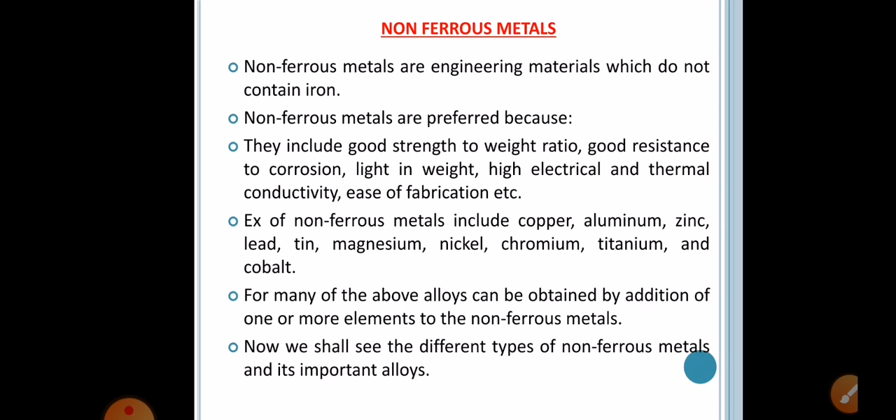And we will see a few of them and their advantages and how do they perform. We'll start with looking at the various, you could say, appearance of these non-ferrous metals. Many a times we can identify a metal just by looking at it. Actually, all of them will have a very different microstructure.

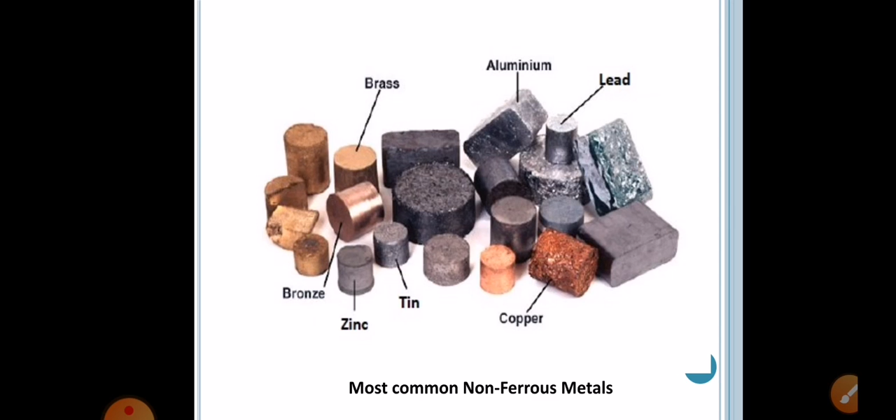The microstructure is, when you observe it under a very special type of a microscope, you can see exactly the grains and the grain boundaries and how it appears under a microscope. And based on the microstructure, you can actually specify which material it is. But for a layman and for us, it is just useful that just by looking at a given metal we can say whether it is a ferrous or non-ferrous, and again in non-ferrous, which one is it: pure copper or aluminum or brass, bronze, and so on.

One of the most important types of non-ferrous metals is aluminium, which in appearance is silvery white. It is very soft and ductile. That is, you can easily give it whatever shape you want. However, the softness can also sometimes be a disadvantage. Hence, pure form of aluminum is generally not used. You are going to add some other metal to it in order to improve these characteristics. So the properties are, it is very light in weight, and you can work on it very easily.

For example, there is an alloy called duralumin, which is an alloy of aluminium, and this alloy is mainly used in aircraft structures. So obviously, aluminium in its pure form, because it is very soft, you can never use it for making aircraft structures and so on. So you have to add something to it. So duralumin is one such alloy of aluminium.

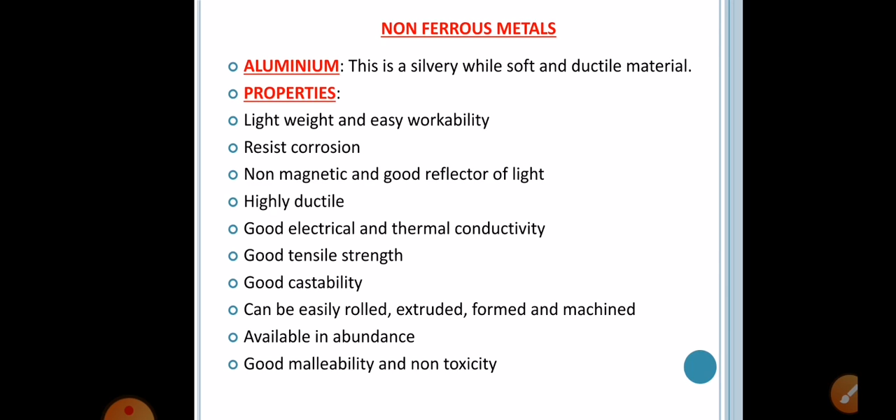Then it is non-magnetic and a good reflector of light because it is shiny. It is highly ductile. That is, you can draw it into thin wires. It has got good electrical and thermal conductivity, good tensile strength, and so on. So these are the properties of aluminum, and you can see what are the various applications, like in electrical appliances, transformers, generators. It is also used in aviation, that is what I just mentioned, and automobile industry, and household applications.

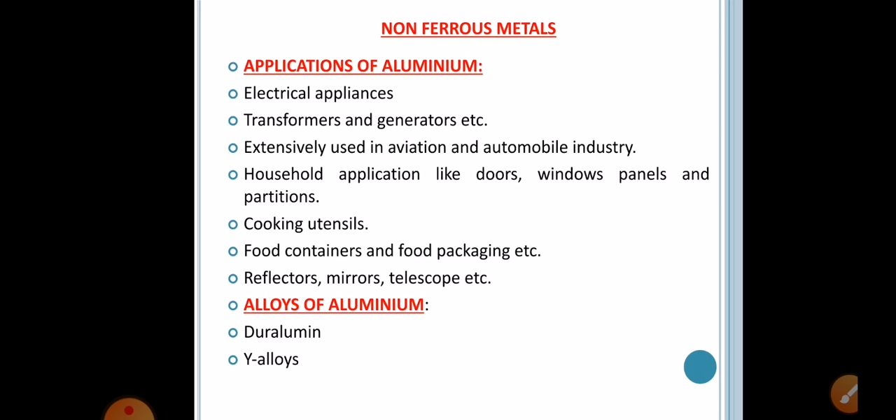These days we have aluminum windows also, and sometimes the door frames are made up of aluminum, cooking utensils, reflectors, mirrors, and so on. And this was the one which I was mentioning, that is duralumin, which is mainly used in aircrafts. So you can see a pictorial representation of where aluminum is used.

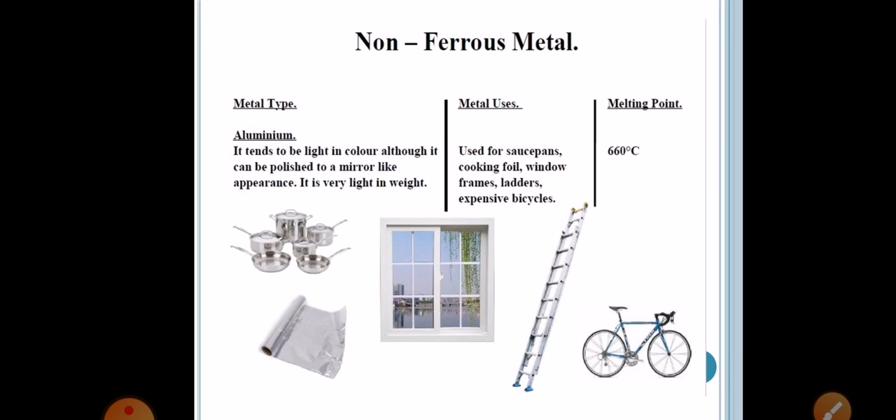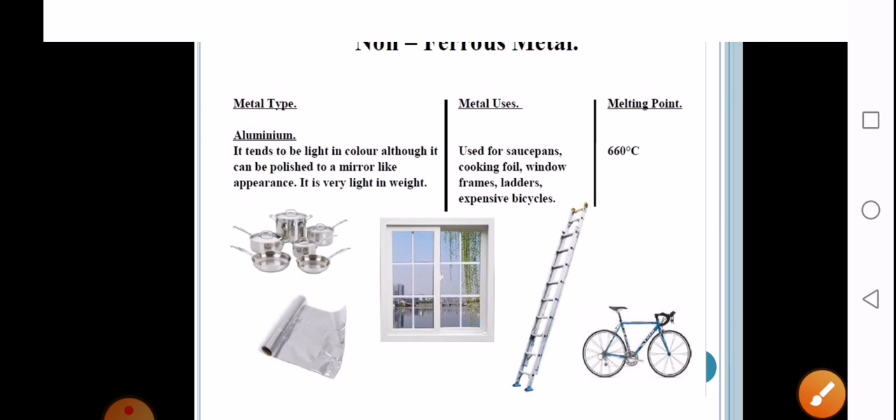We can also see that we have an aluminum ladder which is very popular these days, and some parts of a bicycle can also be made up of some alloy of aluminum, because we want these bicycles, especially racing bicycles, to be as light as possible, so that they will have lesser inertia and can go at a faster rate. The melting point of aluminum is about 660 degrees centigrade.

Now, then we have copper. Copper is the oldest known metal to human beings, and it has got similar properties to that of aluminum. However, the density is more and it is heavier than aluminum. We can say that, again, it has got high electrical conductivity, thermal conductivity, very good corrosion resistance, and so on. However, there was a time when copper was used in abundance in electrical connections and wires.

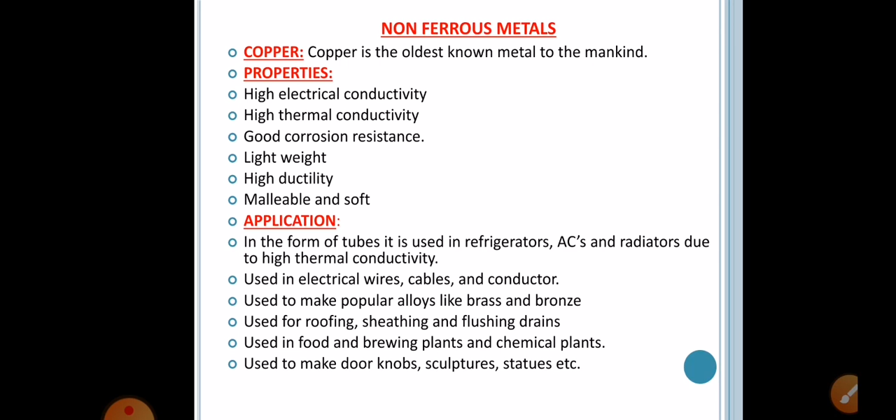However, these days these wires are getting replaced by aluminum wires, mainly because copper has become more expensive. So even though, in applications we say it is used in making electrical wires, cables, and conductors like this, only if there is no other option, then copper is used.

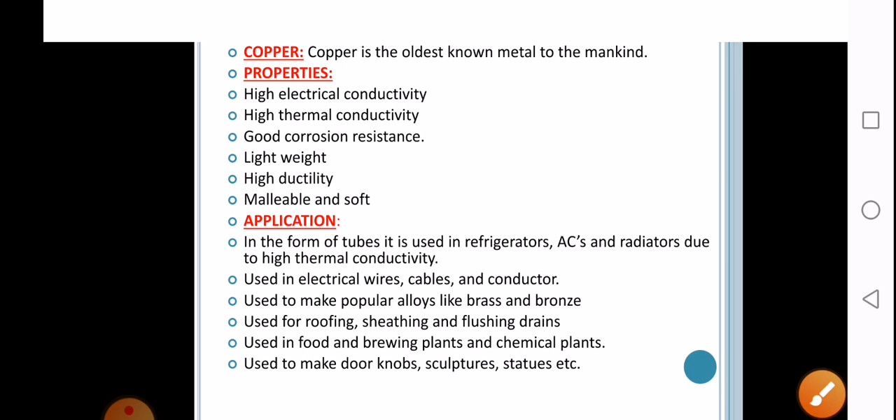Otherwise, aluminum has replaced copper these days. But there are other applications like the tubes. If you remember our discussion on refrigeration and air conditioning, we have the condenser coils and the evaporator coils. These coils or these tubes are generally made up of copper.

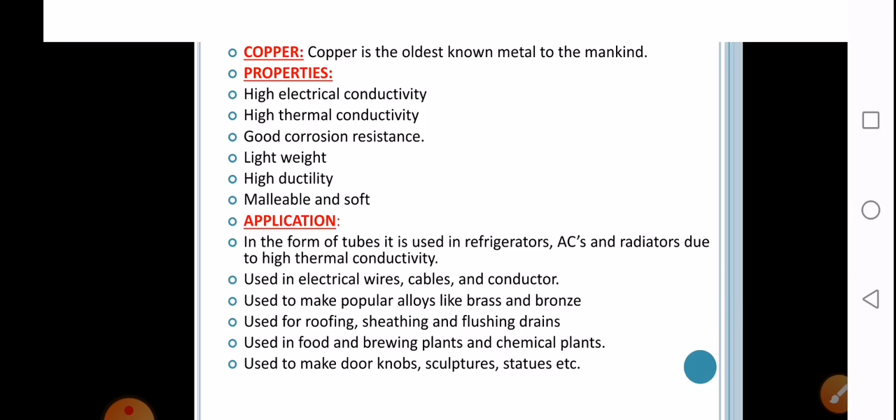And copper is also used in order to make very popular alloys like brass and bronze, which we are going to deal with. And they are used in food and brewing plants, chemical plants, used to make doorknobs, sculptures, statues, etc. So here we can see that the color is again shiny, and that color itself is called as copper color. We generally don't specify it by any particular name.

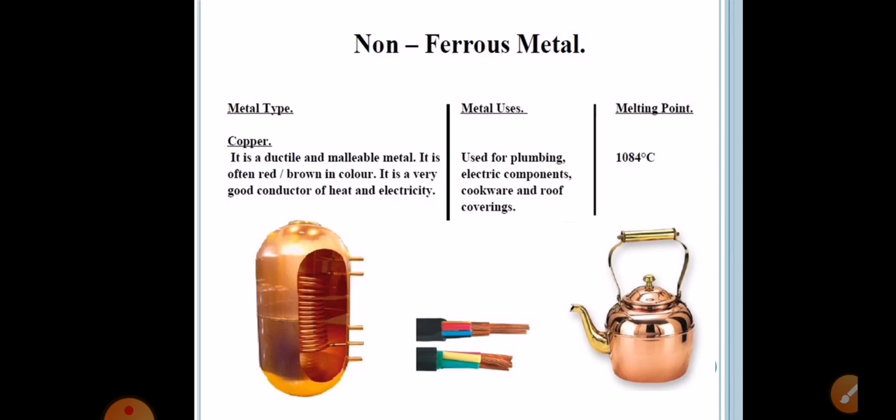And even though it is shown that here it is used for electrical wires and all, these days it has drastically reduced, and newer materials are being used. And the melting point of copper is about 1084 degrees centigrade.

Now we will see the alloys of copper, and two main alloys of copper are brass and bronze. Okay, so even though we see them in our day-to-day lives, we find it slightly difficult to differentiate between brass and bronze. The only way in which we can differentiate is by the color and, of course, their usage. They have got very specific usages.

The first one is brass, where it is made up of copper and zinc. So it can contain 51% to 81% copper, and the remaining part will be zinc. That is, if you use 51% copper, then you will have to use 49% zinc, or if it is 81% copper, then it is 19% zinc.

And the properties are, it is a very good bearing material. We use these as bearings or bushes, many a times, which are used to support rotating shafts. So it is used as a good bearing material, and it has got good machinability. It can be cold worked, that is, you need not heat it in order to give it the required shape and size. At normal room temperature, you can work on it. It has got good castability and resistance to corrosion.

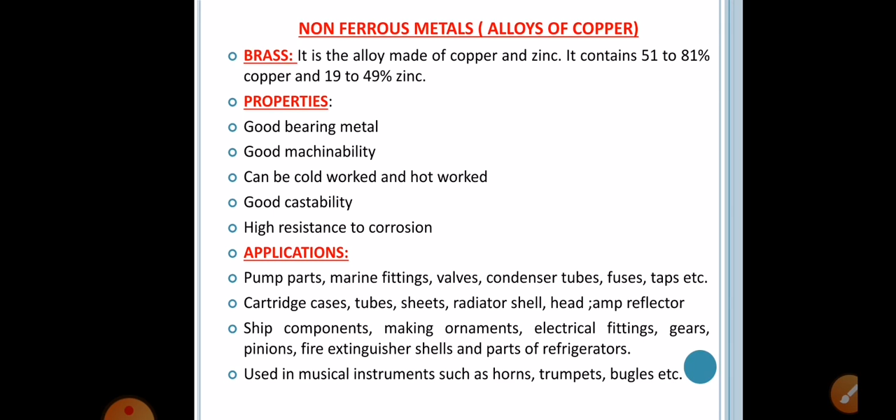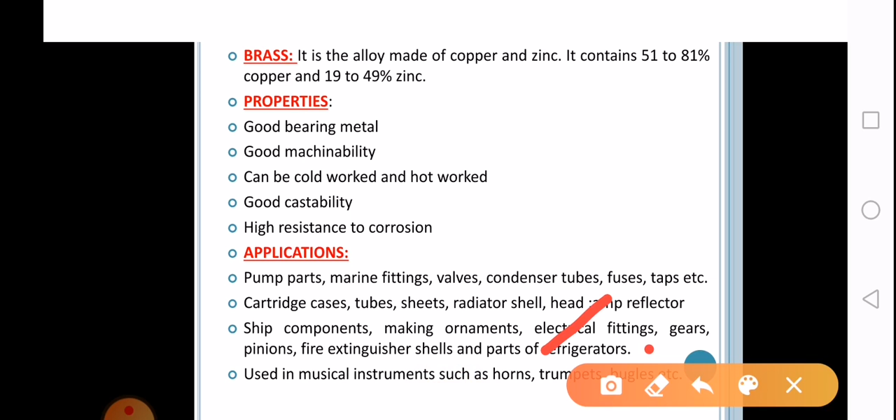And the applications are, they are mainly used in pump parts and marine fittings, valves, condenser tubes, ship components, ornaments, electrical fittings, radiator shells, and so on. These are very common. But if I need to take a very common example, then it is the horns and the bugle and the trumpet. Okay, so we say that it is going to be used in trumpets as well as bugles. So most of you might have, in fact, blown a bugle also in your school days.

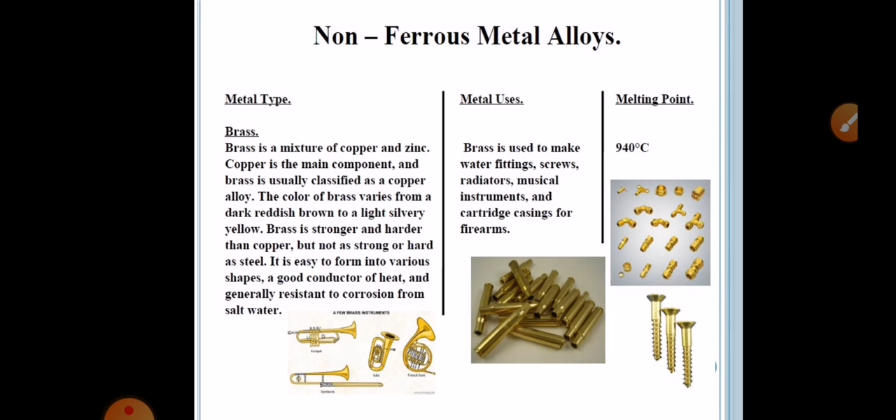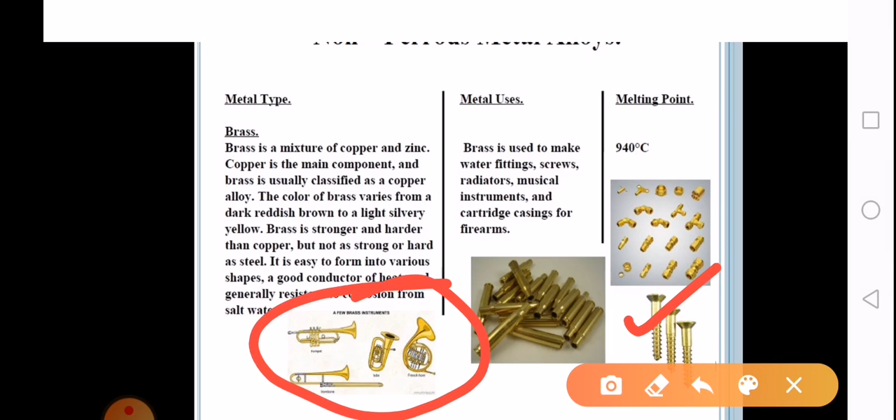So here we can see that it is a very shiny material. In fact, sometimes people get confused with gold also. Brass in its appearance resembles gold. So they can be used for bullet cartridges, that is, in order to make bullets or firearms. And here you can see that they are used for musical instruments. Then sometimes you use screws also. That is, you can make screws made up of brass and so on. And the melting point of brass is 940 degrees centigrade.

Now the next type of alloy of copper is bronze. Here the other metal will be tin. So it is an alloy of copper and tin, and it contains about 5 to 10% of tin, which means that it is made up of about 90% to 95% of copper. This also has got very good strength, and in fact more than brass and copper. It has got good bearing properties and good corrosion resistance, easy machinability, good fatigue strength, and so on.

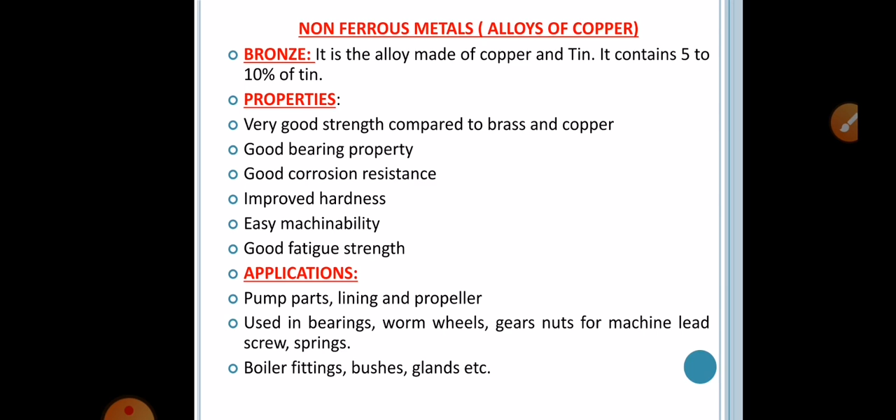Again, similar applications we have, that is, they are used in pump parts, linings, propellers, boiler fittings, bushes, glands, etc. So we talked about different types of turbines, turbine blades, and so on. Here you can see that the turbine blades are generally made up of bronze, mainly because it is a very hard material, and it has got very high resistance to corrosion. So especially in marine applications where the sea water is salty, it is saline, the parts which are used for marine applications need to have this high resistance to corrosion.

Similarly, you can use them to make statues, that is bronze statues and medals and all. If you remember, the bronze medal, for example, in Olympics or any such games, is made up of bronze, and the melting point of bronze is about 950 degrees centigrade.

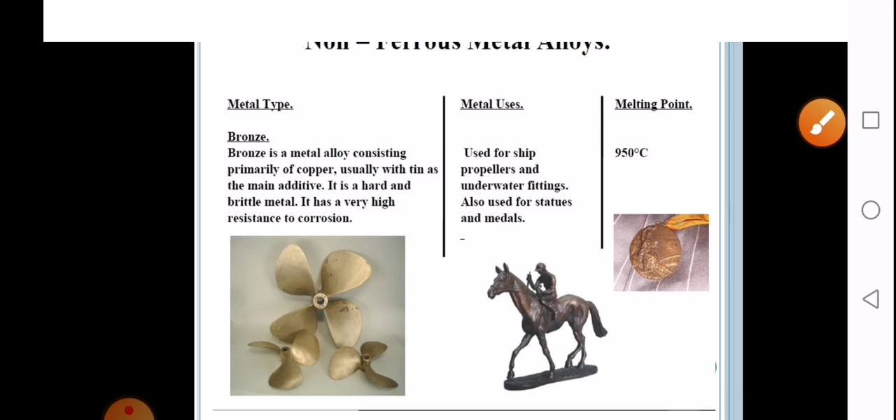Then there are other types of non-ferrous metals, such as tin, lead, zinc, and so on. They have got very specific applications, but this is going to suffice our requirement. So thank you, and please go through the video and go through all the properties, and make sure that you remember all of them.